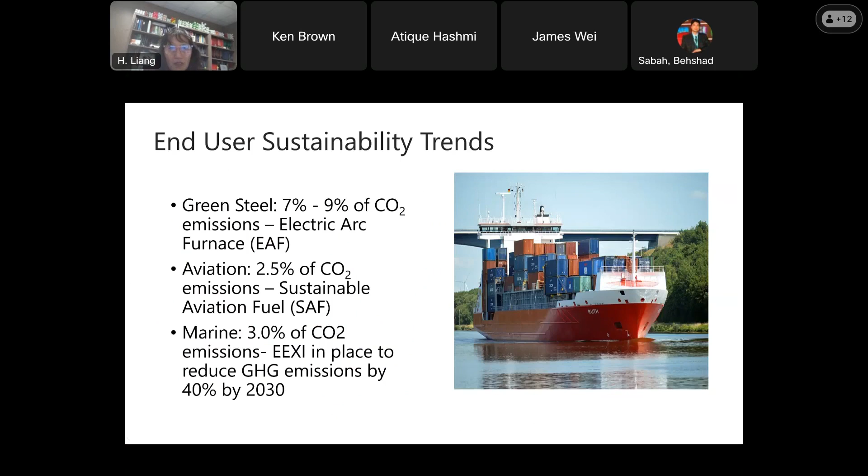These are all related to tribology for us - this is the end-user issue. And then there is an option to reduce the carbon footprint.

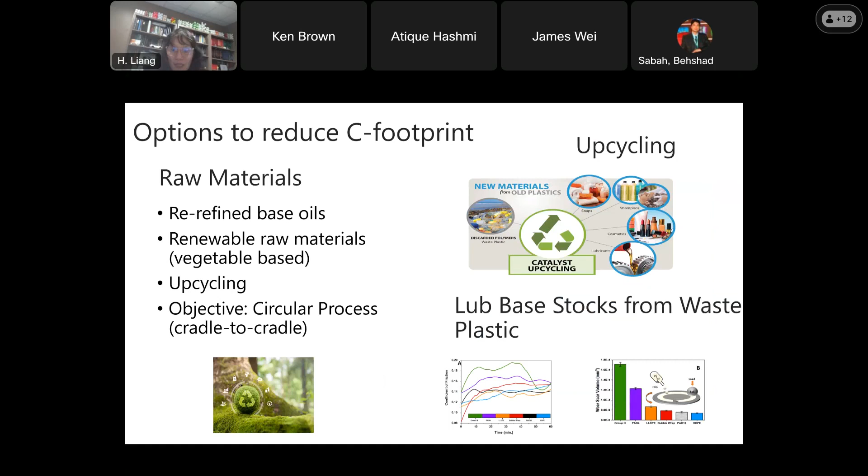In the report, we summarize basically what we can do with raw materials - re-refined base oil, renewable raw materials, upcycling, and circular processes. So the waste can be handled. There's upcycling, and also new base stock from waste plastics, and research has been going on - this is something close to us that we can do.

Another area the trend report talks about is manufacturing. They're looking at 7 different types - basically additive manufacturing, or what we call 3D printing, or hybrid approaches where you have additive manufacturing with other things in it. So those are the different types of approaches, summarized in the report.

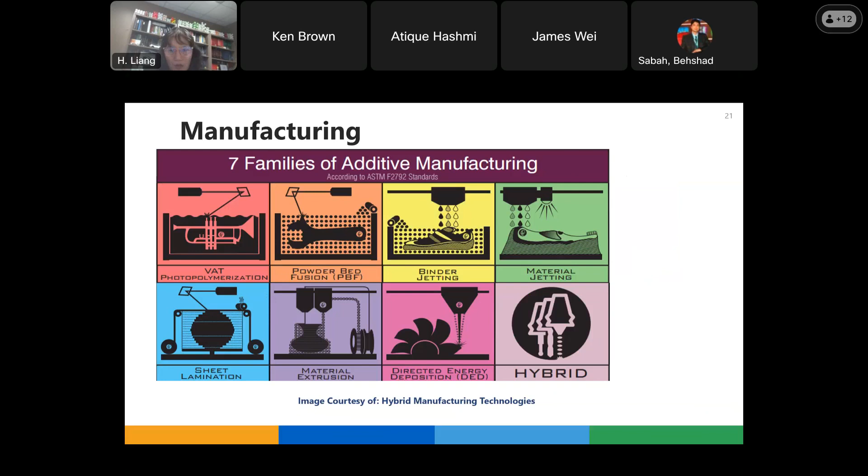Then health and medical - there's an issue related to tribology helping us understand implants. We have implants now getting popular, almost becoming a standard medical procedure for people who have an injury or damage to joints and things like that.

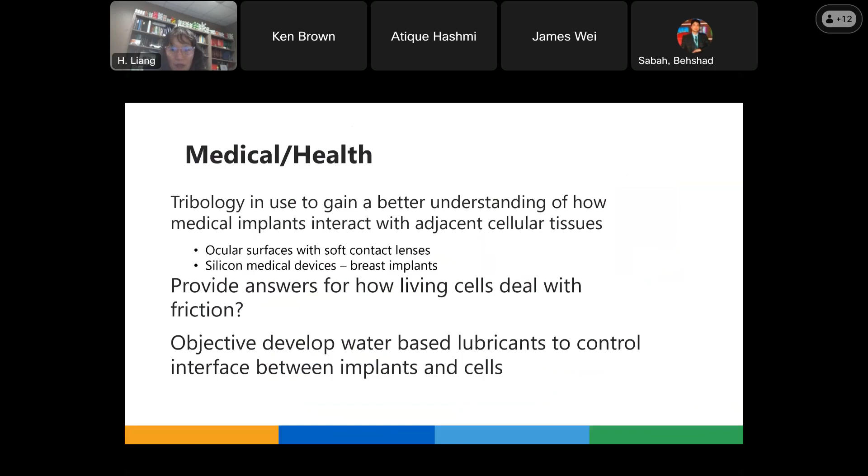But there's still a lot of issues because we want implants to last longer. It's all related to lubricants and tribology contact. So that's a nice area to study, to focus on, maybe develop a new product.

Also, because our area cares about energy and environment, there's a lot of regulations going on around the world. We just listed in the report the current existing regulations - in the US, Europe, and elsewhere. There's still more coming up.

That could be the next focus in the technical areas. Okay, so my screen got frozen.

So another part we talk about is electrification - the EV market, introducing electrical vehicles. I think this area is going to continue to grow no matter what.

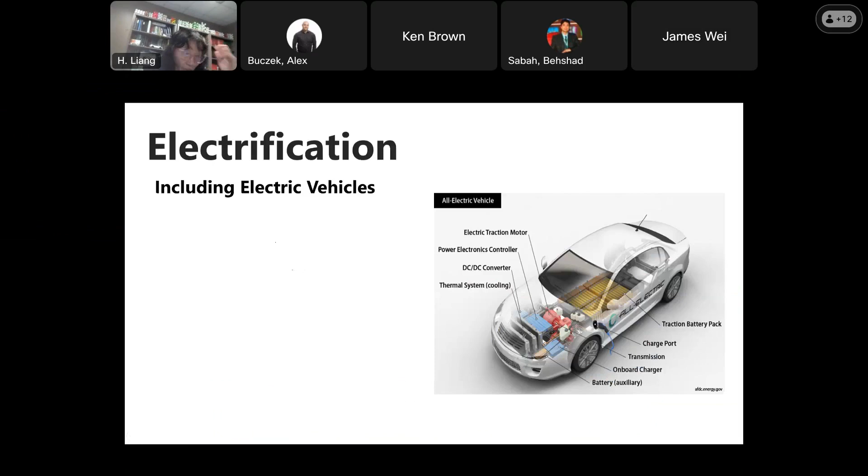From here, I'm going to talk a little bit related to EV, but before that, we're going to talk about sustainability. This is the third topic, the last half topic I'm going to talk about.

So this is how we are distributing, and in order to live healthily, air quality is very important. This is something related to tribology. My student and I did a quick review on vehicle emissions.

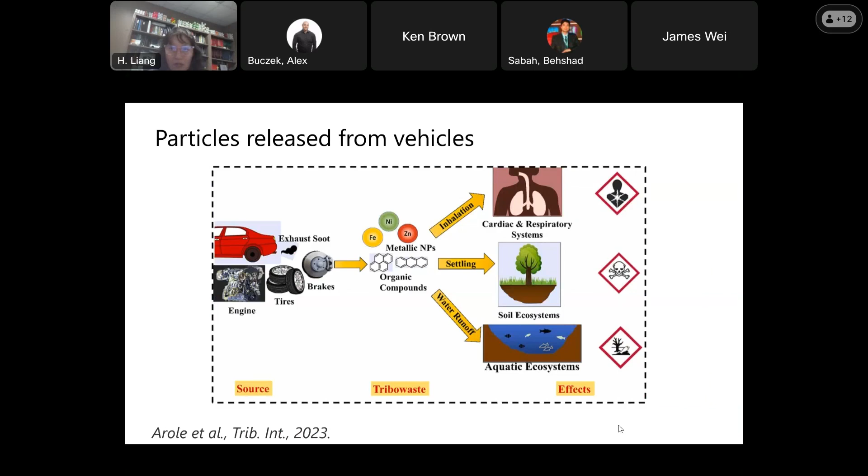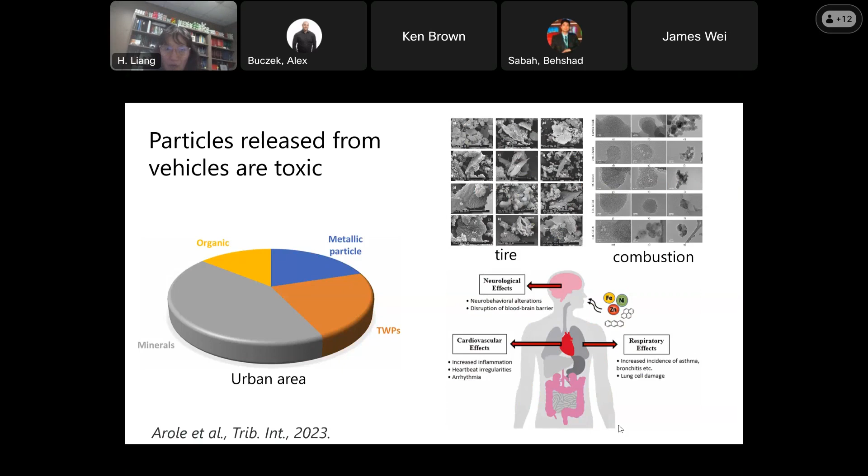So for particle release, we did a quick study, and there are a lot of organic particles, some metallic particles, and some minerals. In urban areas where it's busier, the population is higher, and there's more combustion and tire wear. This summarizes the impact of where the particles go and how that affects health.

Also sometimes nature brings challenges; last year Canada had a huge wildfire, and there was a lot of pollution further affecting our health. That's probably nothing related to tribologists directly, but we're thinking as engineers and scientists about what we can do to help a little bit. So this is something with a lot of challenges. I'll just stop here.

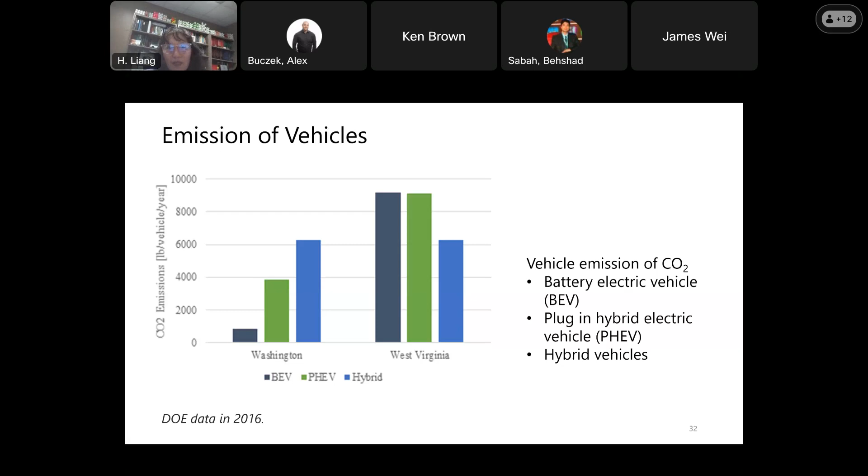You see from West Virginia to Washington State, with the same type of EV but a different location, you're going to emit different amounts. This is related to the energy source, road condition, and distance. So when we design the EV we consider driving habits, but we haven't gone that far because this is all passenger cars, not off-road vehicles.

I think I should stop and pass the slides. I'm going to go to the lubricant used in different EVs. We actually published a review on this, and I can send you the paper.

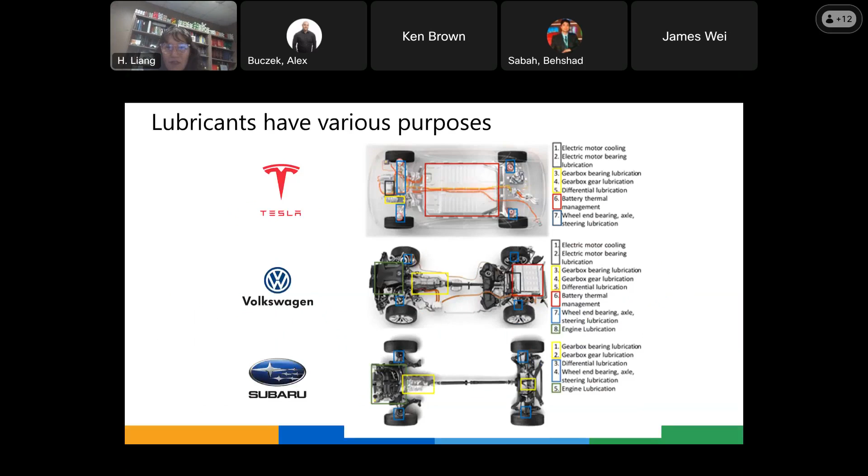The different yellow and orange colors show what the lubricant or other devices where the system is controlling, and that gave us an idea. So if the EV uses lubricant and fluid, what does it do? Basically, the main challenges for electrical vehicles are high acceleration, electrical insulation, and thermal management.

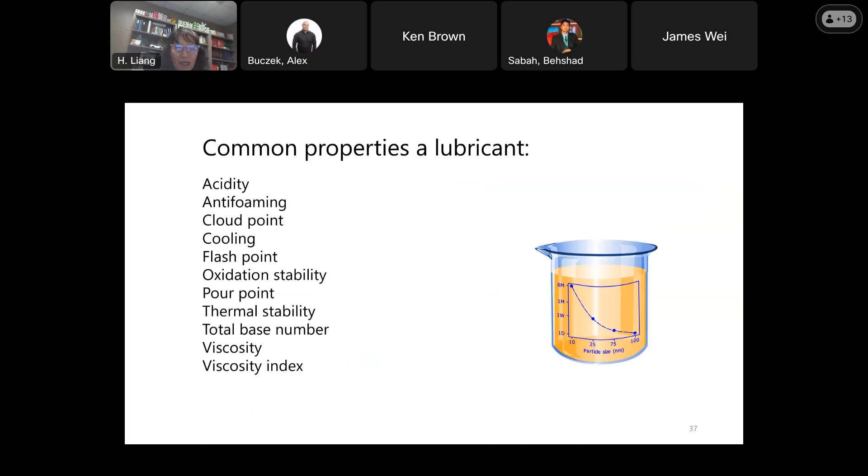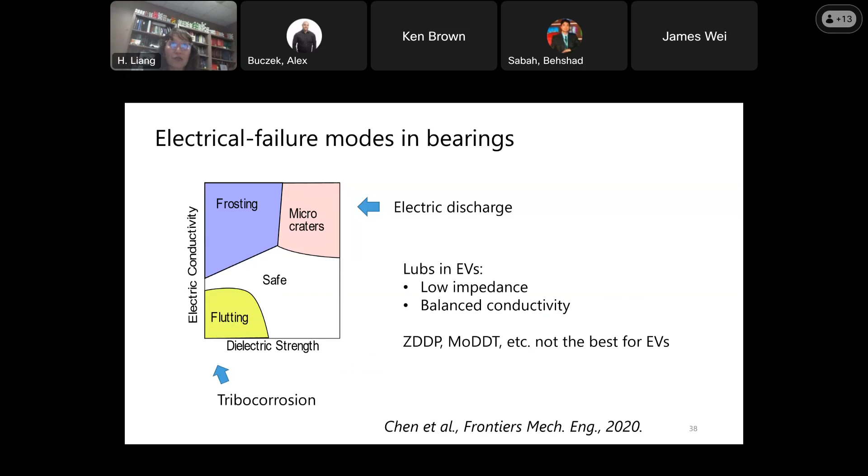And I think due to time, I should stop here, and then we can discuss a little bit more. For the technical part, I can send you a paper, things like that. I'm going to go to here.

So when we design the EV fluid, for example, you fix the viscosity. But when you put in an EV fluid, because of the dynamic condition, the viscosity is going to change. And also the electrical conductivity is going to change. At room temperature, static, the physics determine the electrical conductivity. But when you start to run it in the car, then the property is going to change. So that is what they are going to talk about.

But I will stop here because of time. So sorry about the rush, but we can start more questions and discussion if you have any. So thank you.

Do I stop sharing now? Okay, yeah. So basically, I only have like, I want to stop early. So for the last topic, I only spent about 5 minutes or something, but I can send you a paper.

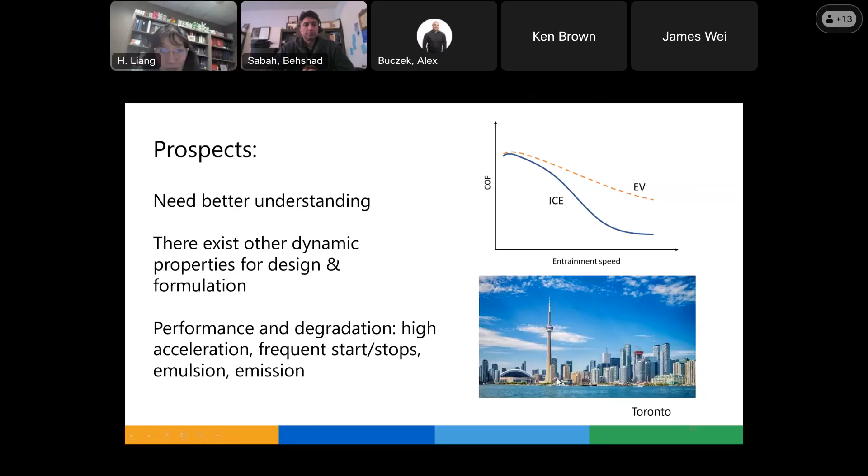Yeah, so I can go back here. Let me see. Okay, let me find that slide. Let me see the number. Okay, so that's slide 36. Oops, 36.

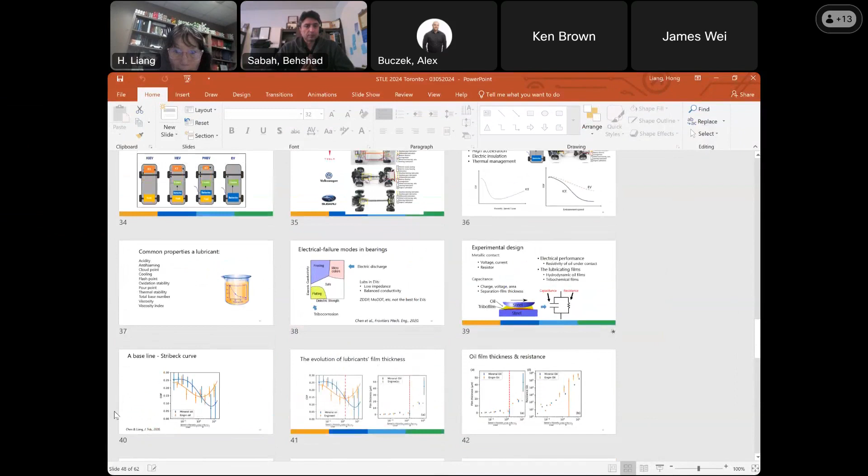That's the one. Yeah, okay.

So this is basically the entrainment speed. Think about a point on the y-axis for the ICE engine. For a certain point, the EV reaches much further much faster. So this is a kind of unified speed. For example, for the first second you start running, the ICE engine runs about 20 miles per hour rotating speed - I don't know exactly what rotating speed means, but it's running. The EV is already just like an electrical motor, so as soon as you put the electrical power in, it's flying.

So the entrainment speed is basically relative. It's not a direct comparison because you really cannot compare directly, but it's because the EV is getting much faster. So we had to put it on the same axis, and it just symbolizes the difference.

So what is that? Yeah. Ken, is it okay to continue, or do you have another question? There's another question by James.

James is asking if there are commercial EV fluids available today, or if development of EV fluids is still in the early stage. I think the commercial manufacturers, what they're doing is they have commercial fluid that they add something to themselves, so they don't talk about it. There's no standard EV fluid right now, but the OEMs have been using something for themselves.